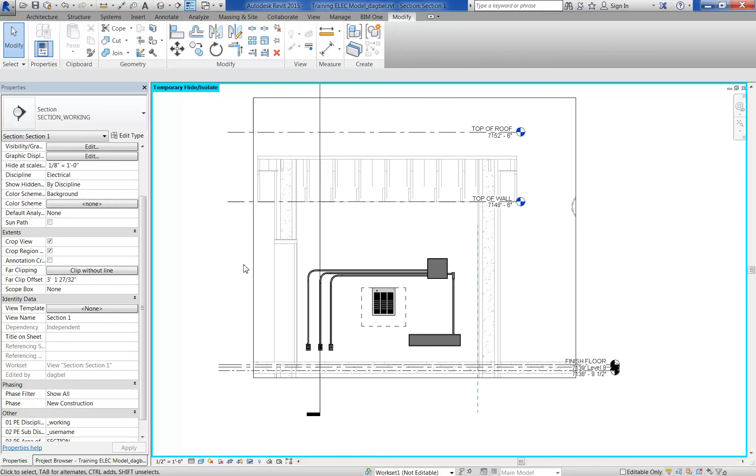Let's move into doing some underground conduit with large radius sweeps. In general, for routing conduit over large distances, it helps to have at least three views open: a section view, two orthogonal section views really, to give you X, Y, and Z routing, plus a three-dimensional view to check how your conduit route is progressing.

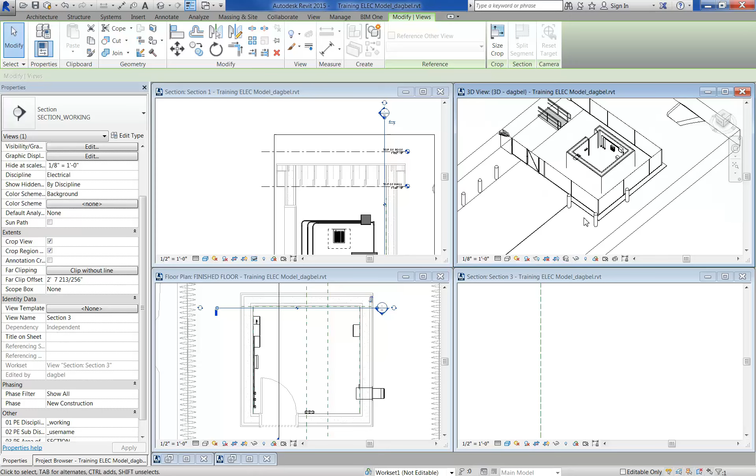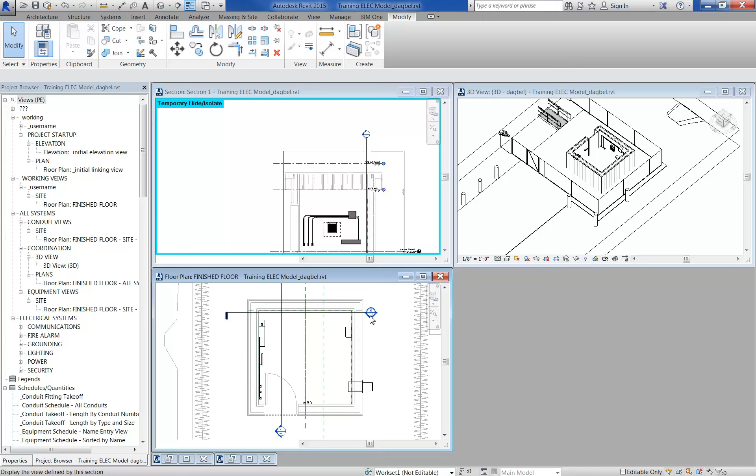And then a plan view. This is not the plan view, we want a plan view. No, there's the plan view. So: a plan view, two orthogonal views, to be able to see the conduit routes.

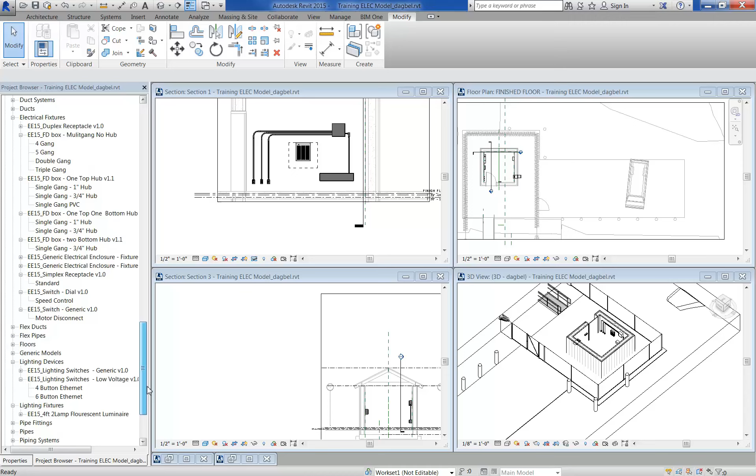Before we get too far into this, let's place a target for our conduit route. We'll go here to families and see if we have the precast pull box in our template model. It would be under electrical equipment, and I don't see it here, so let's go ahead and add that.

Insert, load a family, and under the electrical families we have precast concrete fixtures. We'll get a resizable handhole, and we're going to go ahead and place that in our model. It's electrical equipment.

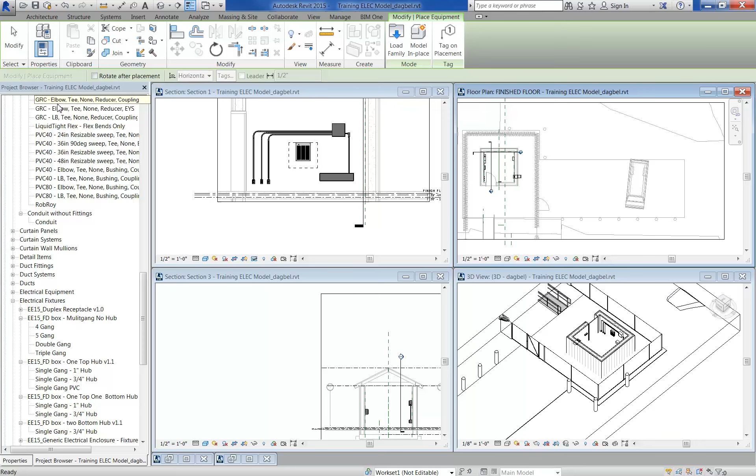Let's make it a 3x4x5. Go here to the type, we're going to change this one to a 3x4x5 box. Make it 3 inches wide by... no, it's 4 feet wide, 5 feet long, 3 feet deep. It's a precast communication handhole, 48 by 60 by 36 inches deep.

We'll keep the traffic rated lid. We'll just assume that we can find this in a catalog later. We don't have a part number for it yet.

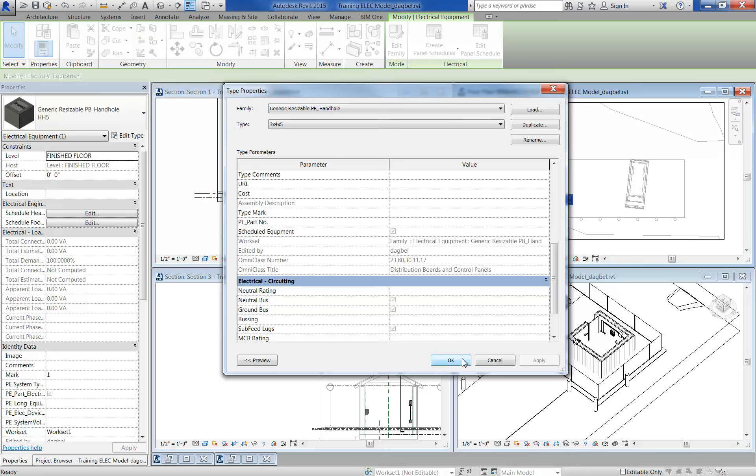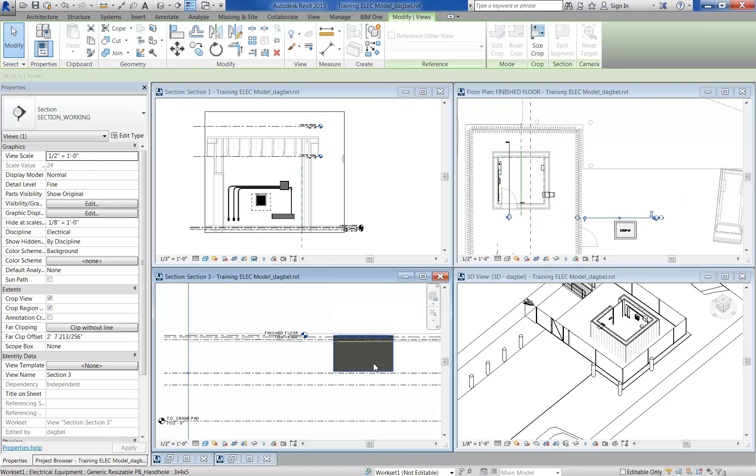While we're looking at that, we want to make sure that it is actually, if we look here in the 3D view, submerged beneath the ground a little bit. So go to our plan view, let's move our section view over, that's our working section view. And we can take a look at the actual location of the handhole - you can see it is submerged beneath the surface.

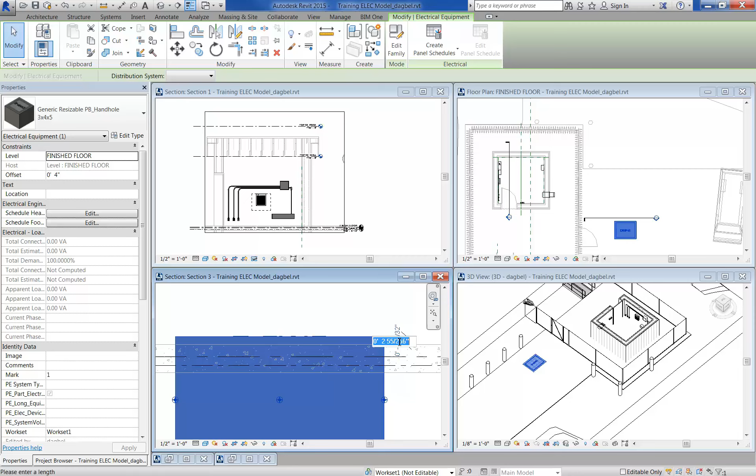So bring that up just a little bit, and there you go, you can see it now. Usually in the real world you're going to have 3 to 6 inches above finished grade for the upper lid. So you can select that item, dimension it, and then tell it you want the upper lid 3 inches above the surrounding surface, and it'll move that for you.

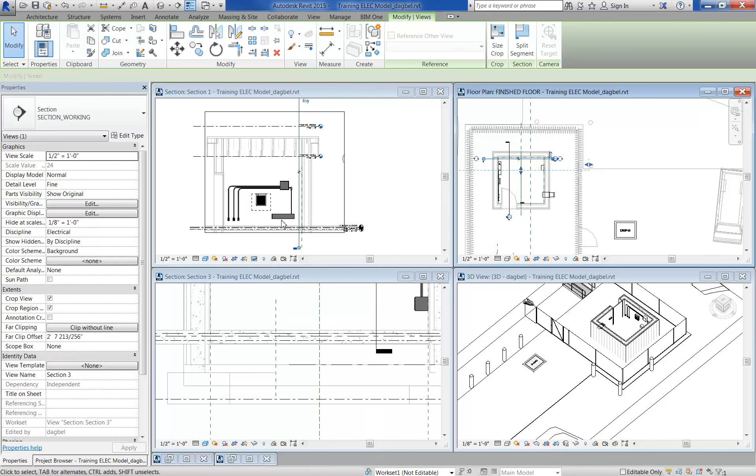So that's going to be our target. We'll assume that's a comm pull box. For the sake of argument, we'll assume we're pulling fiber from this wireway, and our fiber optic group has specified they want 36-inch sweeps for all conduits containing their fiber conductors. So in order to do that, we need to create a conduit type that uses 36-inch sweeps.

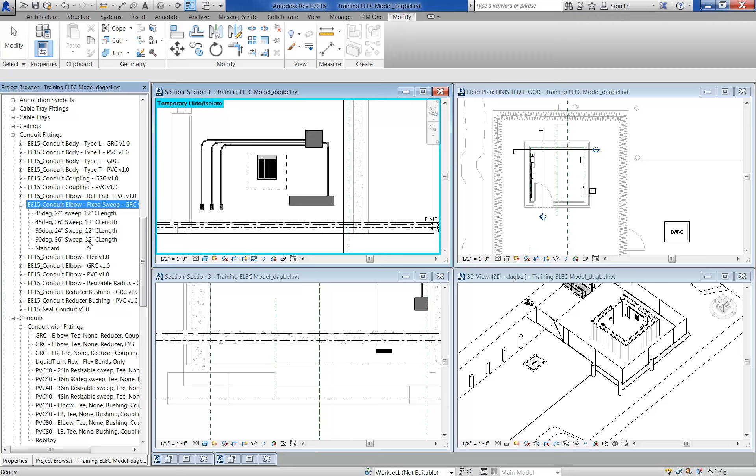So there's a couple of ways to do that. We have some fixed sweep elbows, which you can use to specify exact angles and exact sweep dimensions, and even the conduit straight sections on the end of those sweeps. This would be catalog information. The problem with this is you have to use exact angles for the fitting.

They're not resizable. Another solution, probably an easier solution, is if you go to Manage, MEP Settings, Electrical Settings, or you can just push the ES keys. We've created some size standards within the electrical settings. Basically what it does is it takes the sizes of the conduits and forces all of the minimum bend radius to be 48 inches.

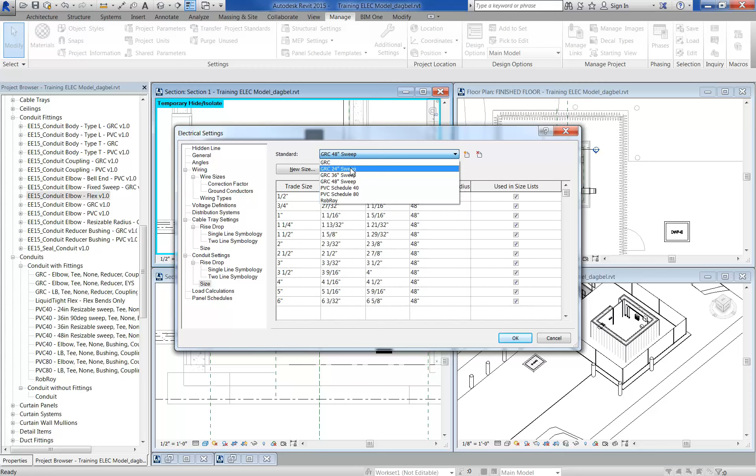So regardless of the actual radius of your turn, it will force that radius to be at least 48 inches. You can make it larger, but you can never make it smaller. So that's what we're going to do - we're going to use a conduit type that uses that size standard for making the bend.

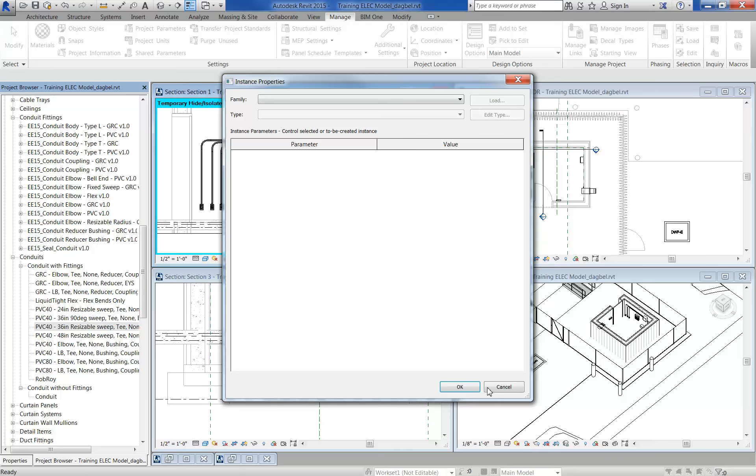So we'll just pick a... it looks like there's already been one created here, a PVC 40 for underground conduit with a 36-inch resizable sweep. If we take a look at that definition, look at the type properties - you can see that the standard it's using is this 36-inch sweep standard. It's using the galvanized rigid sizing, which is essentially the same as PVC 40, and forces the sweep to be 36 inches.

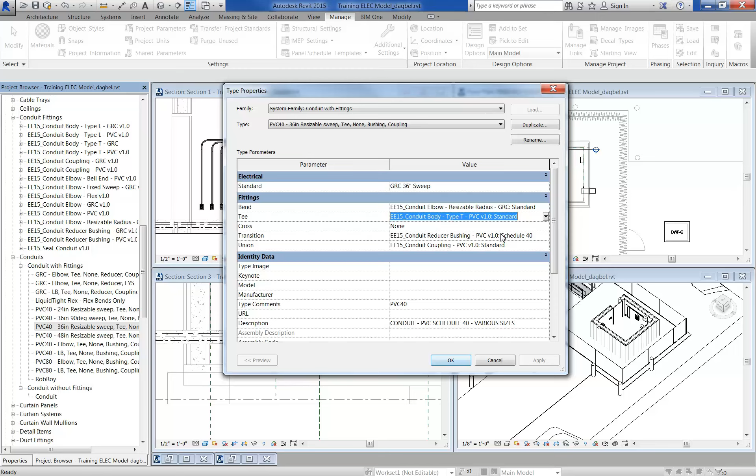And the type comment is set to PVC 40. It's using the GRC elbow, which is what we expect for underground. We could really get rid of these T's since we're not going to use any in underground, but we'll leave them in as is for now.

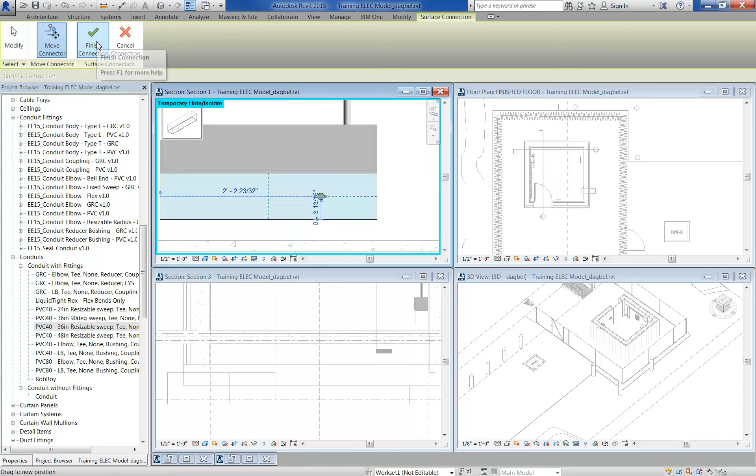We'll go ahead and start drawing some conduit, drawing from the face. Let's move this connector over to one side a little bit. We'll say we want 3 conduits coming out of here - let's do 2 3-inch conduits. We'll start one and then try to duplicate it.

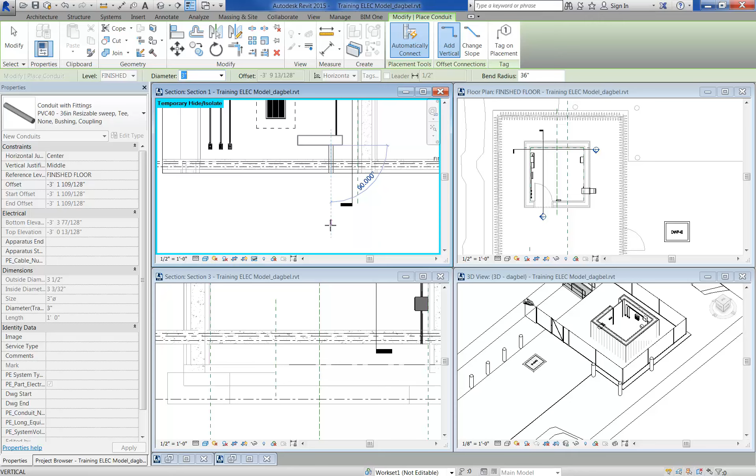Make sure we're in the right conduit type, using the resizable 36-inch sweep, with a diameter of 3 inches, coming down out of the box. You can see we're outside the crop region, so let's extend the crop region out a little bit so we can see better. Now we've dropped the conduit down, and we need to switch to one of the other views in order to create the sweep.

Note that because we're using the 36-inch sweep sizing standard, it automatically gives us a radius 36-inch bend. Let's draw this, extend this out.

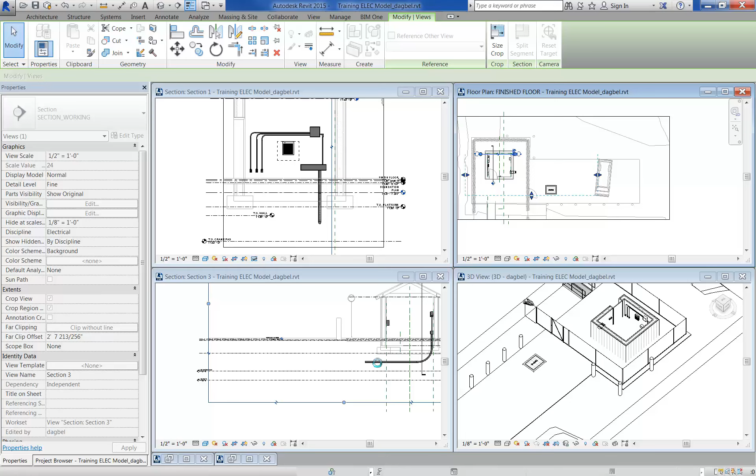If we switch to the plan view, we can make sure that we extend the crop region so we can see our target box. There it is.

If you want to adjust the angle, of course you could do that, because this is a resizable elbow, so it will let you change the angle.

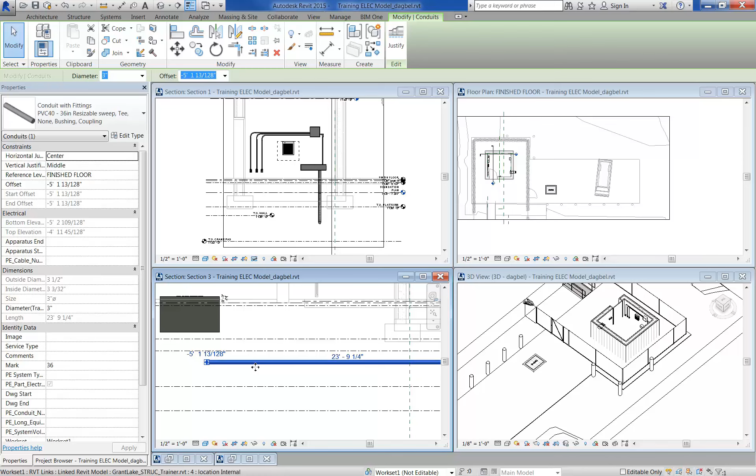We're going to come to about there. Let's switch this to wireframe so we can see through the ground. Or rather, not wireframe. Wireframe's fine, it's the view range that's killing us here. Get unlimited view range. There we go, now we can see the conduit.

We'll draw this conduit. You could try to connect it here. Let's see what happens.

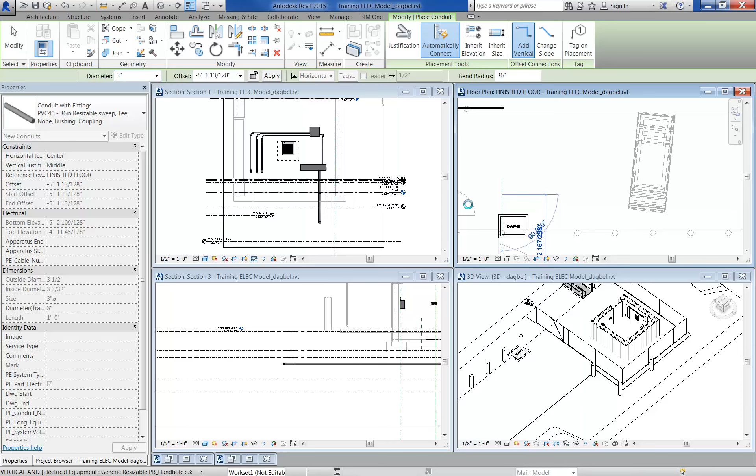And that time it was able to come up with a solution. Let's take a look at a 3D view, see what kind of solution it came up with. Let's go ahead and turn off the topography.

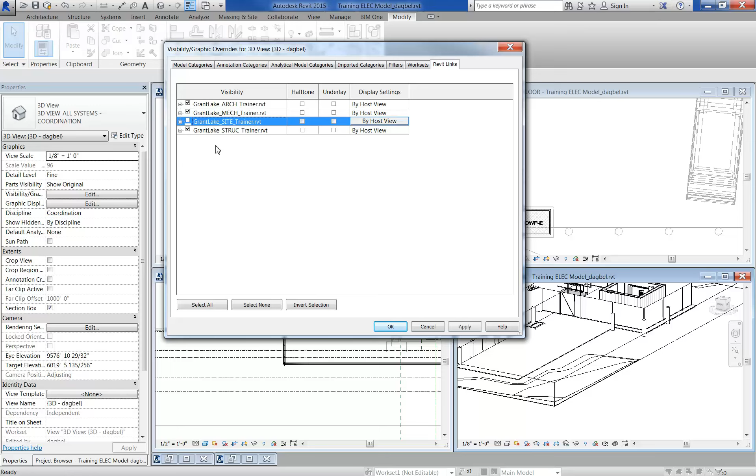We'll extend this section view, this section box, so that we can see our conduit. That's not too bad. You'll notice that it came up with the bends and the straight sections all on its own.

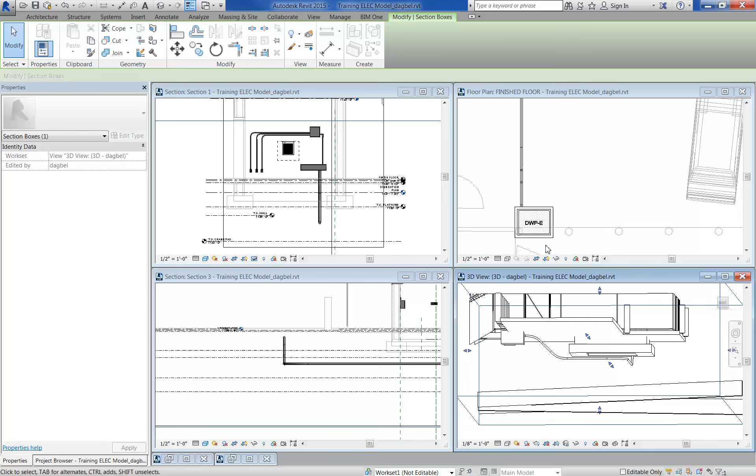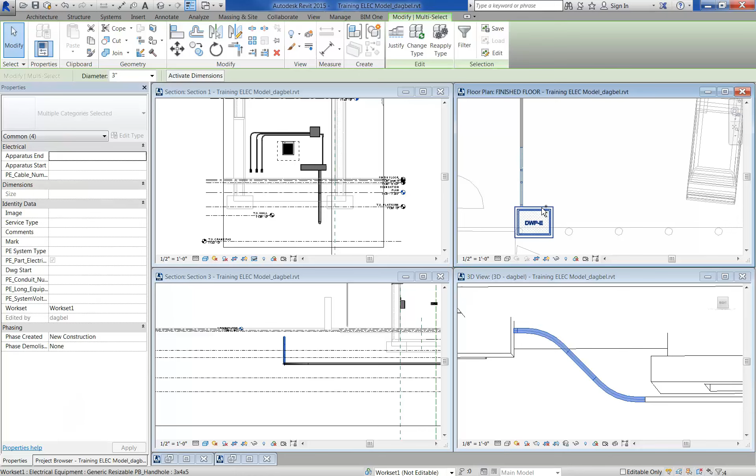Let's see if we can reposition that box. No. Sometimes you can select enough of the fittings and then try to move the whole assembly. Revit is a little more forgiving that way. Yeah, there you go.

So we're bending it, we're moving it based on this, we're resizing just this one small section of conduit. We're telling it to keep all this the same, and we're just going to move it along this little axis here.

So there's our 36-inch sweep, and let's use the parallel conduits tool to duplicate this run.

If you hover over and then tab the entire run, you can sometimes get all the conduits that are associated with that run, which is not what we want here. So to unselect them, we'll hold down the shift button and unselect everything that isn't a conduit, and then we'll filter out things that are not conduits.

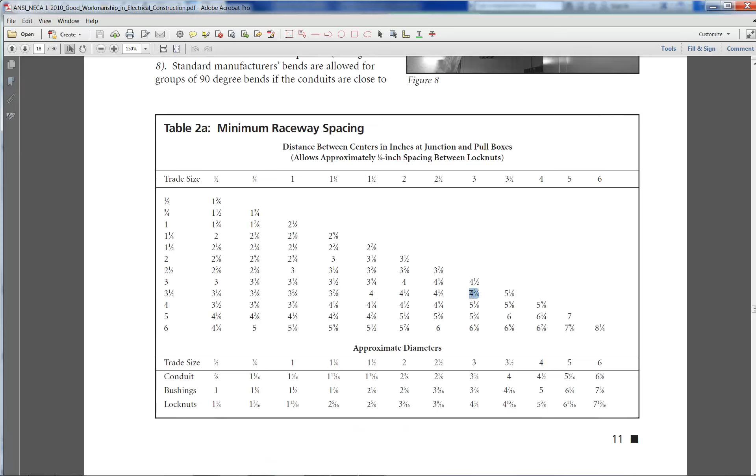Now that we have just this conduit run that we're interested in selected, we can go to parallel conduits. If we look at our minimum raceway spacing for 3-inch versus 3-inch conduits, the minimum spacing between each conduit is 4.5 inches. So we'll do a horizontal offset of 4.5 inches, that should be fine.

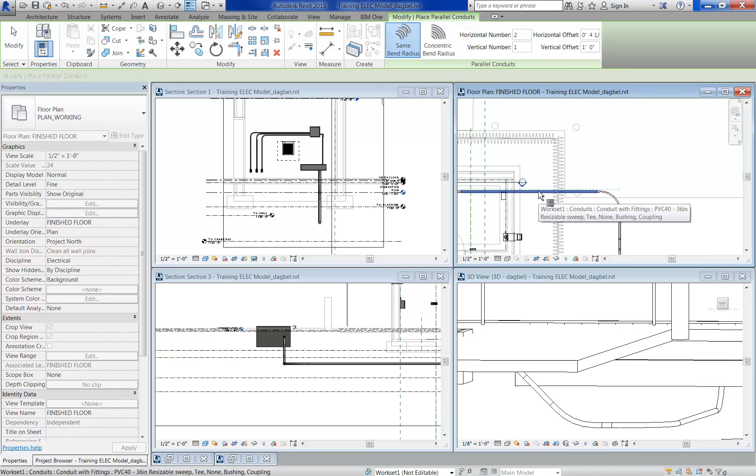This horizontal vertical offset changes based on where you place the conduit. So we got one there, one there.

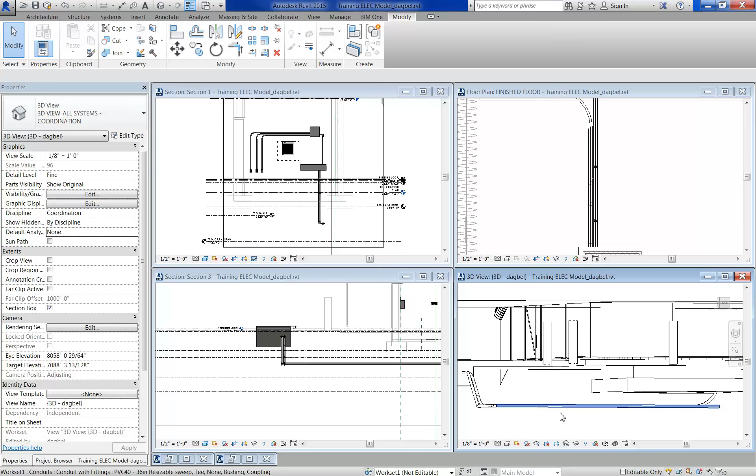You can try doing this one here, and we'll only let you offset the straight sections, then you just have to go back. You can try doing the whole run. Sometimes that works, sometimes it doesn't.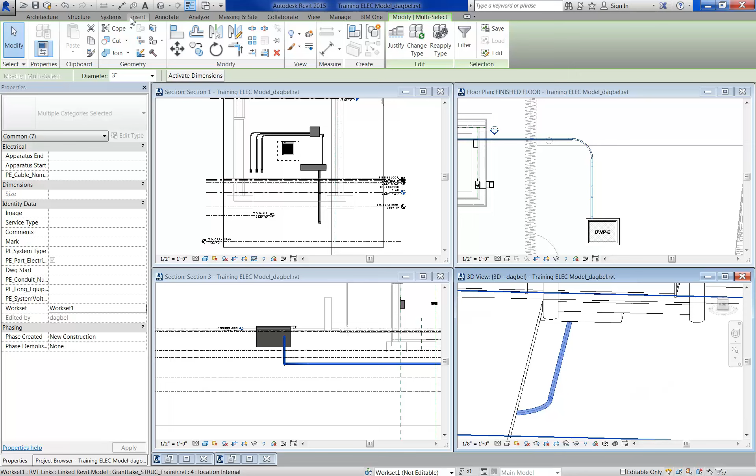For instance, if we tried to select all this conduit here, and then told it we want to parallel, it may let us, it may not.

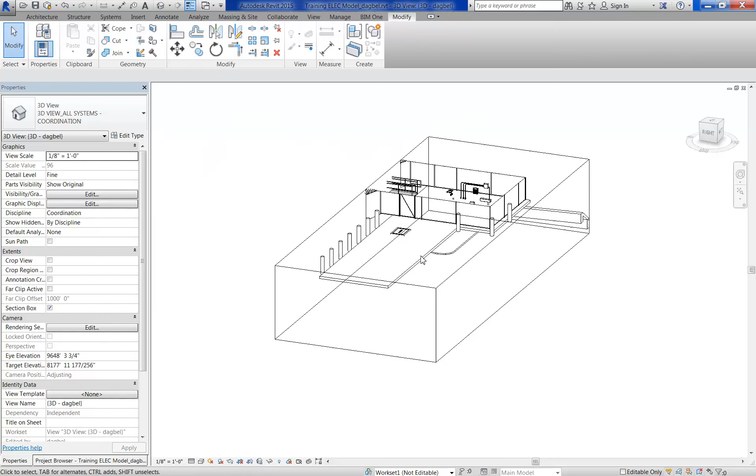Go ahead and turn off the architectural view, get that stuff out of the way. And we'll hide everything except the conduit that we're looking at.

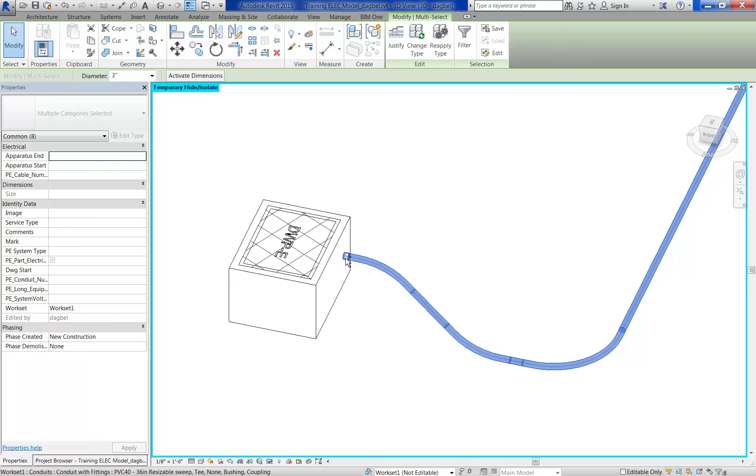Let's see if we can get this to work. Working with the parallel conduit sometimes is more hassle than it's worth, but you get a nice model.

So we can select the entire chain here by hovering. Let's see what that does. Oh, there you go.

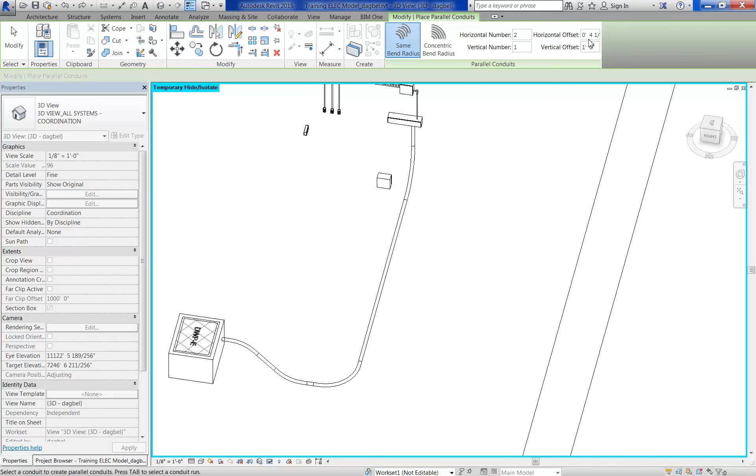Just to redo that: system, parallel conduits, hover and select once you determine the offset that you want. And now it's going to parallel all those highlighted conduits, and there it went. You've got now a 2 conduit run.

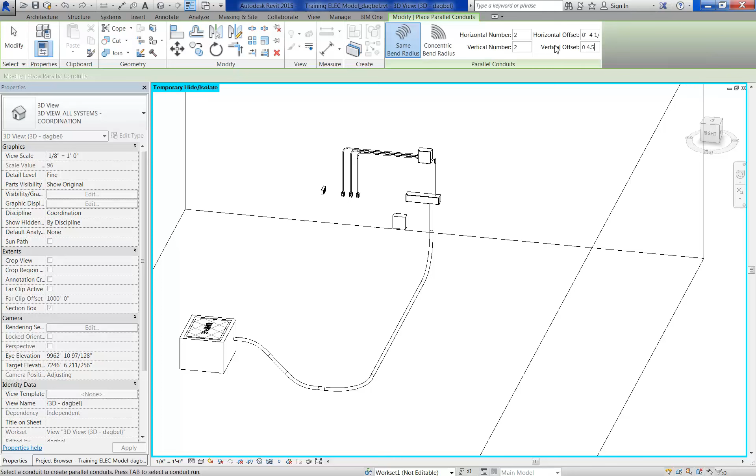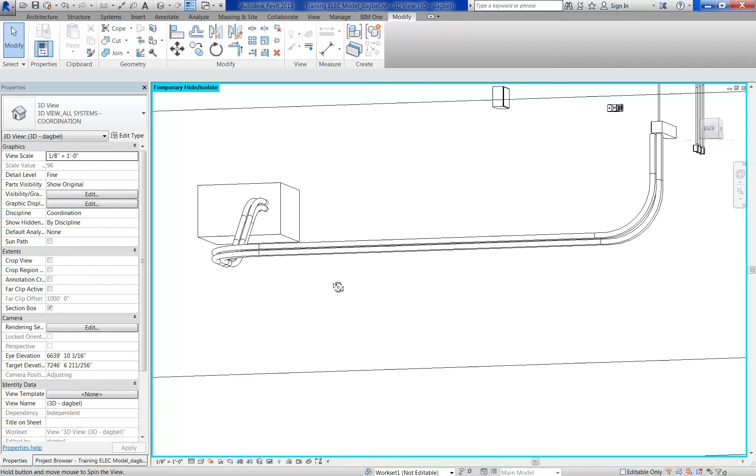If we wanted to do, let's say we wanted to stack 2 by 2, you can do that as well. There's actually not enough room for that, but as you can see here, the conduits on the vertical section weren't able to connect, but you can see what a nice conduit duct bank it's able to create if you've set your initial connections properly.

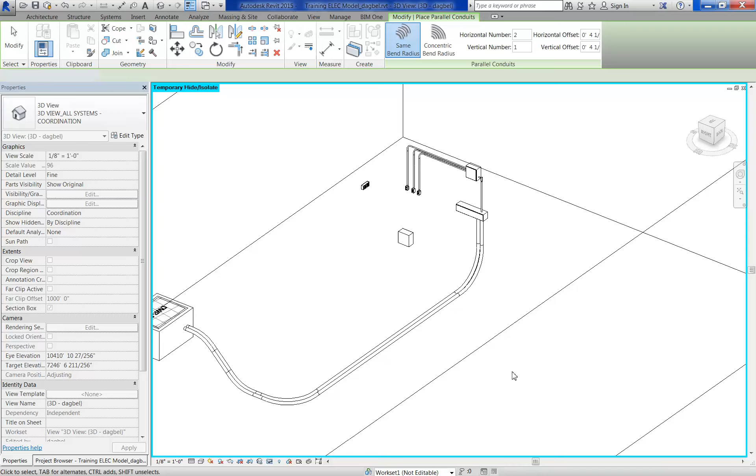But we'll go ahead, we were only planning to do 2 conduits, so that works out just fine. We got our 2 conduit route, and now let's go ahead and number these conduits.

Make sure that, so you can tab it, we'll try to select everything that's connected, but we only want one of these conduits to have the number. So shift and click to unselect the conduits that we don't want numbered, and then we're going to apply the conduit number to those.

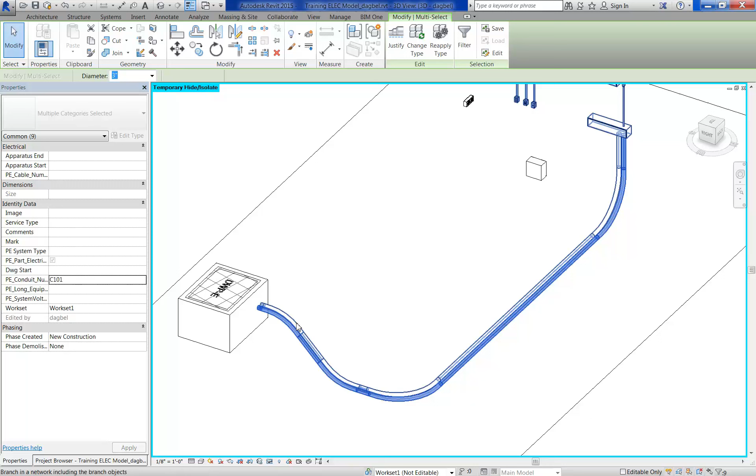We're going to call that C101. This one is going to be C102.

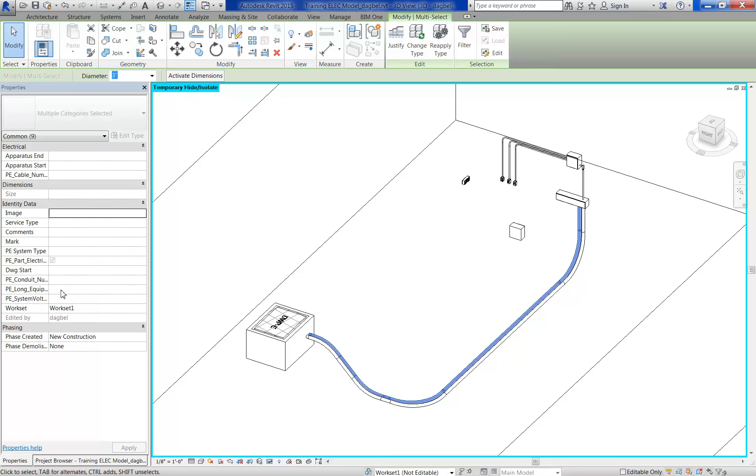Did it renumber these conduits when I was working? No, okay, so we're good.

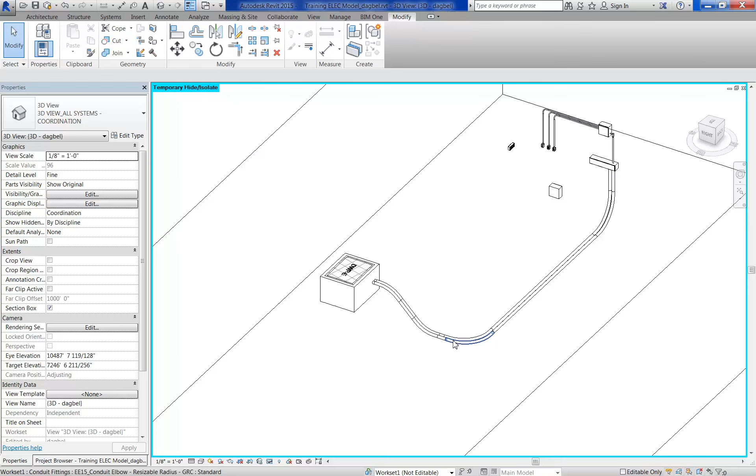Okay, so now we've got conduits, and we've got numbers selected for numbers input for the conduits. It's important during the modeling phase to make sure that you have at least the conduit number applied. As you go through and do the schedule, it filters all the conduits based on the conduit number you've selected in the model. So if you have failed to number conduits, you'll get a blank space in your conduit schedule, and you won't be able to schedule anything. So you have to at least set the conduit number.

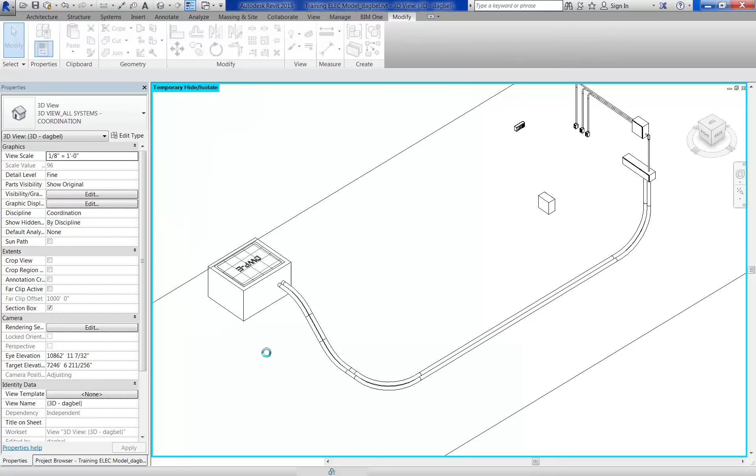Let's go back and we'll turn the other links back on. We will unhide the objects that we had temporarily hidden.

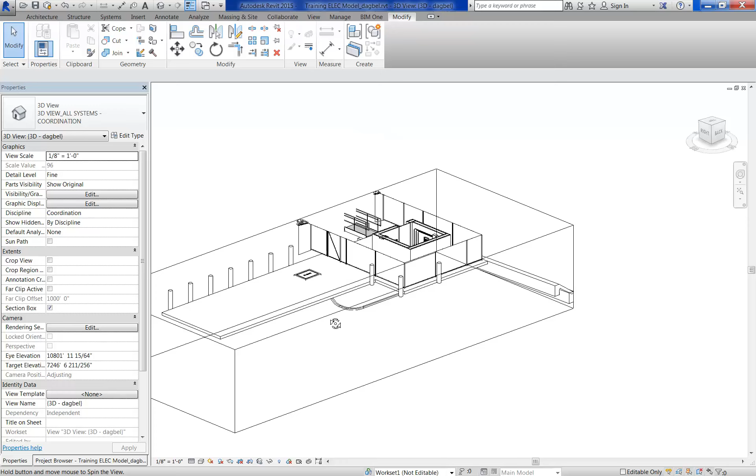And now let's go ahead and try to schedule our equipment, or rather schedule our conduit.